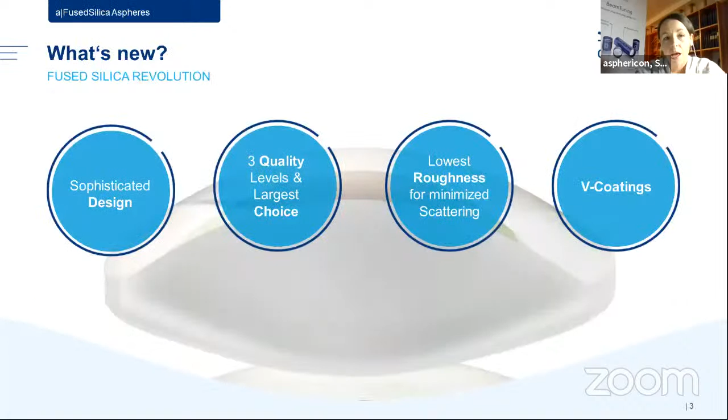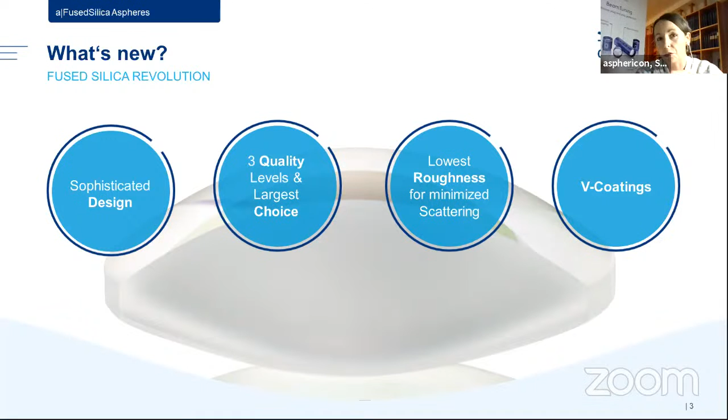What we have done is we have completely enlarged our whole assortment by first adding new designs. Then we have added a lot more quality levels for our customers to choose from, to get really the right quality level for their application needs. We have also implemented new aspheric lenses with a very low roughness. And to round this all up for our customers, we also added new coating lines for them.

So what is that in detail? The optical designs that we have added are all based on 355 nanometers, so totally in the UV range. And this means we have added a lot more diameter to focal length options that our customers can choose from. So everybody will find the perfect fit for its application.

And you should especially look for those UV lenses if you have an application that calls for a low thermal expansion, if you need a low dispersion, or just if you do material processing, or for most ultra-short laser applications, this could be a very good help.

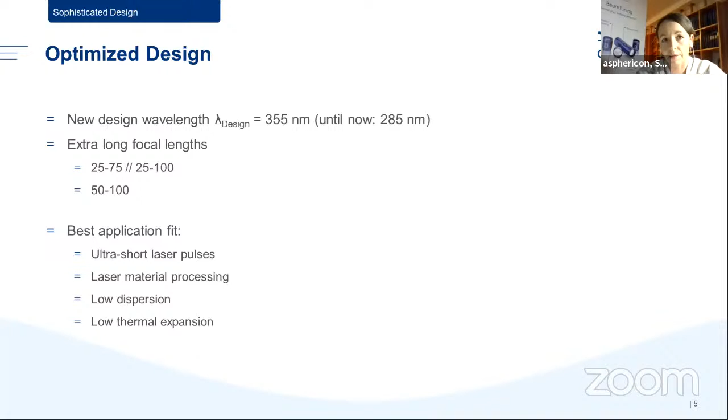The quality levels that we have added.

First is the precision level. This is pretty much a standard level that is very common in the market, and this is what we call our value champion. So it's a very easy to start lens with a surface form deviation of 500 nanometers.

Then we have the ultra quality, which is only 300 nanometers of form deviation. This is about 66% above the industrial average, so it's already a lens with a very high quality performance.

And last but not least, we have implemented our new industrial benchmark that rounds up the beam tuning components. This has a very low surface form deviation, and those are also the lenses that have the very, very low surface roughness.

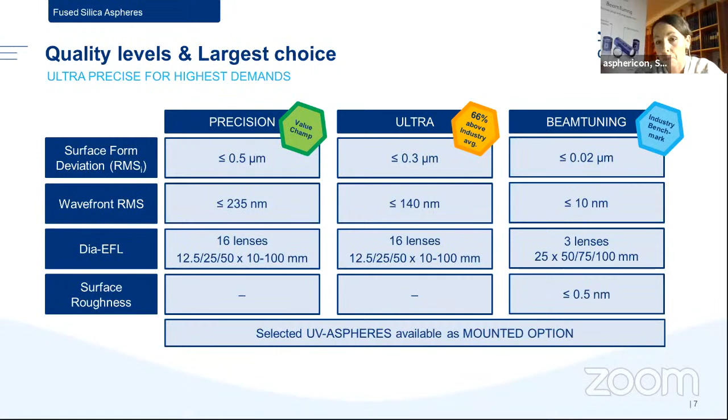The surface roughness is something that we wanted to implement because if it comes to applications that call for low scattering, this is what you should take care of. Low scattering is mainly asked if you have an application with a very high laser power. You don't want to have anything that does backscattering. You really want to avoid this.

And this is very unique in the market, because these are the first off-the-shelf lenses that you can buy with such a low surface roughness for such high power laser applications.

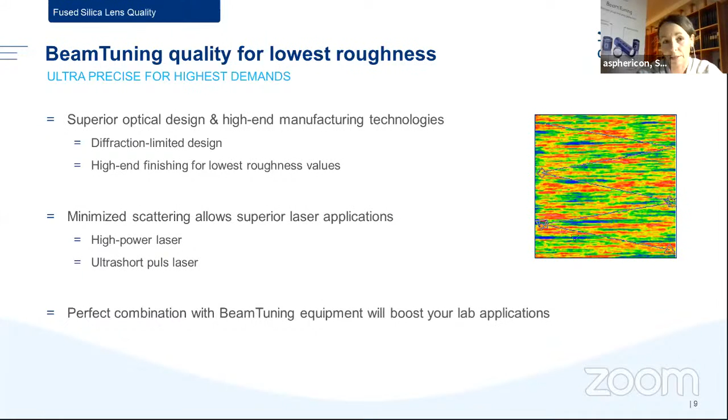You might be aware of our broadband coatings that we offer, but when every photon counts, you want to have a V coating. So we decided to also implement those V coatings, starting with three V coating lines for some very typical laser wavelengths. This helps you find the best solution for your application.

We also offer most of the lenses mounted, which helps you have them perfectly aligned. It makes them very highly modular with all our other beam tuning components or other components from asphericon. It also gives a more easy handling opportunity, and they are compatible with other threads in the market, so you can also use them with cameras you already have in your setup.

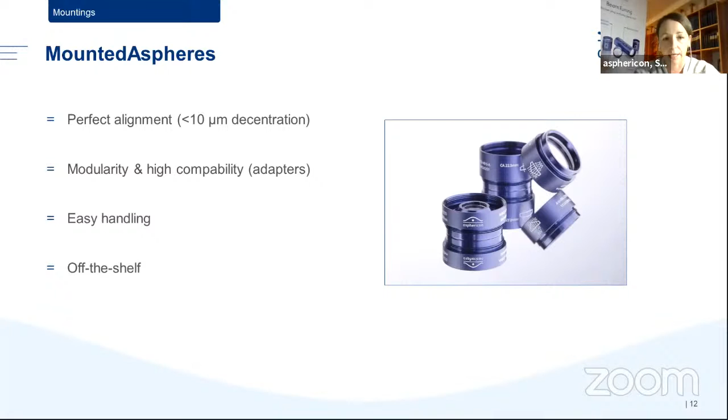What should you take home? With all the new lenses added to our assortment, we can now offer the largest selection of UV aspheres in the whole market that you can buy as off-the-shelf lenses.

You can really start from the value champions up to the new industrial benchmark, where we can offer this very low surface roughness if you want to use such lenses for high power laser applications. And to round it all up, we have those new V coatings available for you. So everybody should find something that fits into their applications where they need aspheric lenses made of fused silica.

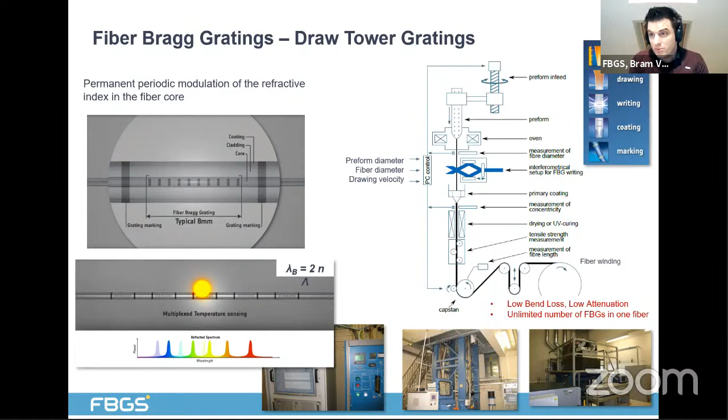And also important, the primary fiber coating is only applied after the grating is inscribed. So when the fiber is coming off the tower, the gratings are inside, the coating is on, and we basically still have the pristine strength of the optical fiber maintained, so that it is not affected by the inscription of the gratings.

Moving then in the direction of shape sensing, a critical aspect are so-called multicore fibers, which are enabling that shape sensing intelligence. A multicore fiber basically consists of several active cores in the same cladding. Typically, there is one center core surrounded by 3 or 6 outer cores. We actually did several iterations of that fiber manufacturing process, standardizing now around a cladding diameter of 125 micrometer with typically 4 overall cores in that multicore fiber.

It's important to mention that the draw tower grating technology is used to, again, combine the grating inscription and the fiber drawing. That means that we then avoid fiber bundling, core-to-core inscriptions, and there is also a very minimal influence of the inscription process on the fiber strength. So the fiber itself is the sensor element, very strong, and is capable of surviving assembly processes, typical sterilization processes coming into play with medical applications.

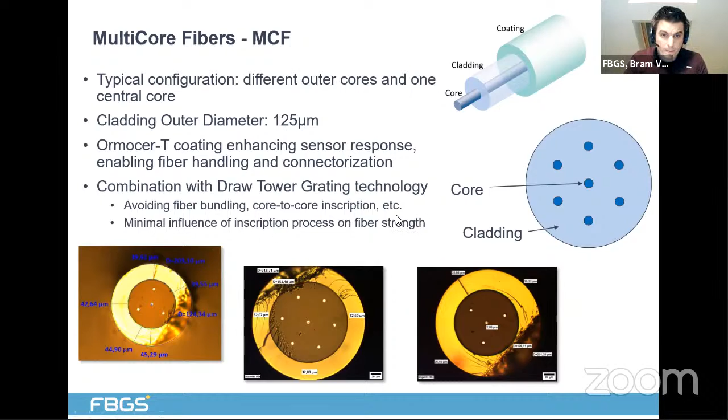If we then take it one step further and we come to the actual product we want to present here and we are actually releasing as we speak, then we of course need to add several other building blocks to come to an overall shape sensing system. We need to connect the fiber, we need to interrogate the fiber.

So we have an interrogation unit, a measurement device capable of reading out multicore fibers and interpreting the Bragg grating responses to translate the sensing information in the fiber into actual shape information capable of visualizing curvatures, position tracking, and so on and so forth.

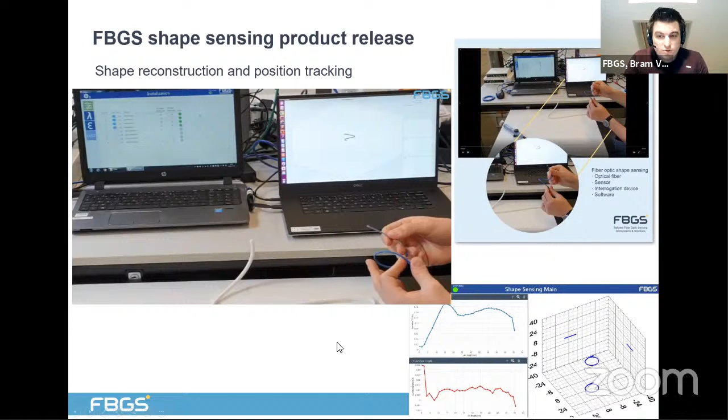This is a very basic visualization. Again, this is a plugin software we developed, can be tailored to the needs of the customer, and is then also typically combined with other feedback mechanisms and other sensing information.

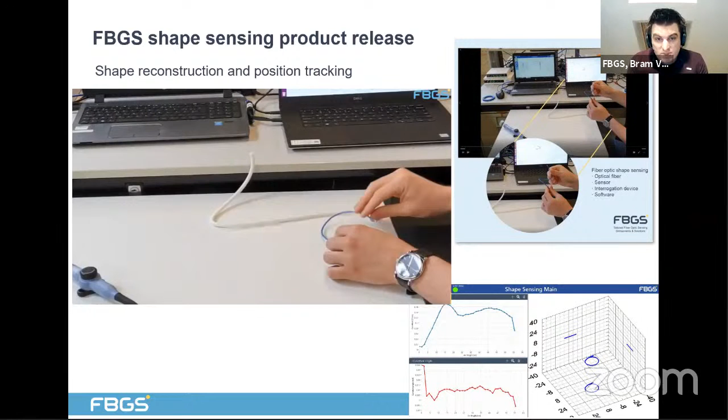I will not go over all this text. I think it's important to mention that we combine the unobtrusive multicore fiber technology and Bragg grating technology in one automated process. One of the key applications we identified is navigating surgical instruments in and on the human body. That's actually a very broad spectrum.

And of course, the reason for that is that the current availability and accuracy of existing tracking tools is very limited. So our customers are reducing health risks and also increasing the efficiency of different surgical procedures and all sorts of medical procedures actually.

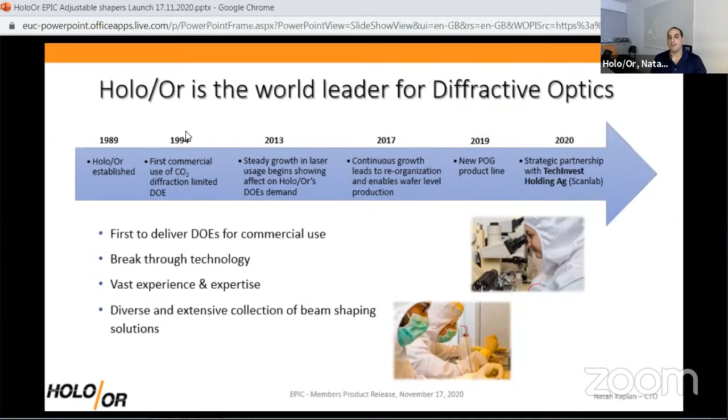For those not familiar with HoloOr, we are one of the world's most veteran producers of diffractive optics for high power. We have more than 31 years of experience in diffractive optics manufacture. We started off with shaping for 10.6 CO2 lasers for Coherent, and went up from there, covering the entire spectrum from the deep UV to the mid IR. HoloOr designs and produces in Israel the diffractive optic components that go into laser systems.

These laser systems can be anything from aesthetic treatment systems such as fractional skin treatment, through industrial systems in the macro like welding or cutting, and in the micro such as micro LED manufacturing, liftoff, scribing for solar panels. It's all done with DOEs. These DOEs, or diffractive optical elements, are basically thin windows with micro and deep patterns on their surface that can shape the phase to any desired profile, and then shape the intensity at the focus of the lens at the far field to whatever you want.

DOEs have a lot of advantages over standard refractive optics. They have high LIDTs because they're flat and don't need high angle coatings. They have absolute angular precision, with no tolerances on that because of lithographic production processes, and they're thin and compact. We can put a lot of shaping on one surface, for example a lens function plus shaping to a circle or a ring, plus other things like splitting.

Today, I want to focus on shaping for welding and cutting with fiber lasers, mostly multimode fiber lasers of 6 kilowatts and above, mostly for automotive, but also aerospace, shipping, etc. DOEs can shape the light of any laser to any desired shape. Many of these shapes, such as this flat top or this racing shape, are often used in welding and cutting.

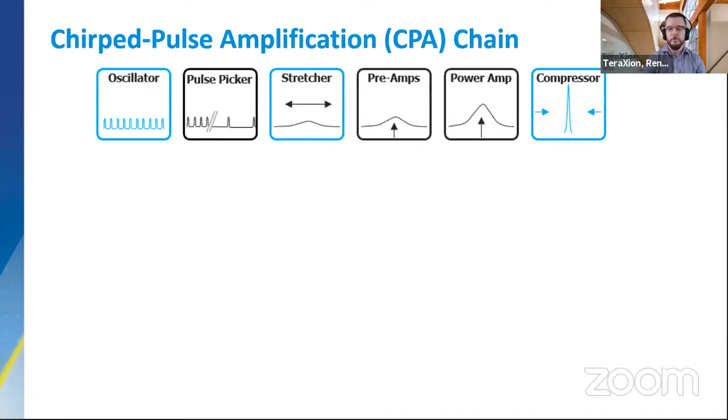You might recognize these building blocks. They represent TeraXion's overview of a chirped pulse amplified ultrafast laser, or CPA architecture laser. Our current offering comprises dispersion compensators for the mode-locked oscillator and a whole family of fixed and tunable pulse stretchers. They stretch the pulse over time before the amplification chain. This is the first function of the CPA technique.

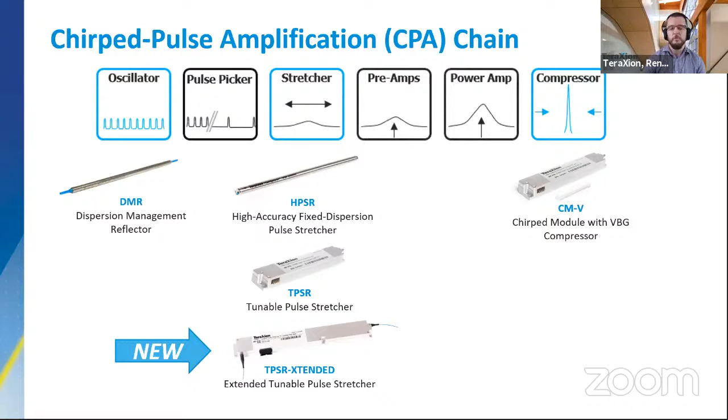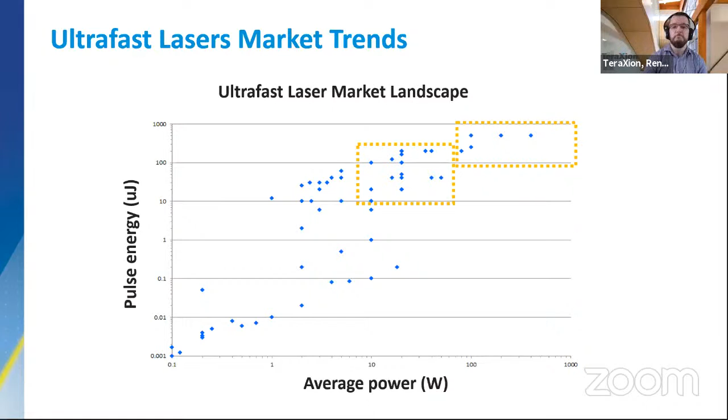This tunable pulse stretcher allows our customers to maximize the amplifier capacity by adding 50% more energy per pulse. It can adjust the high order dispersion up to beta 5. And based on our customer feedback, the tuning feature improves the laser manufacturing yield while maintaining a constant performance for every laser produced. They even improve their laser specification. While it's common to tune the compressor to optimize the pulse quality, it adds some mechanical instabilities and limits the tuning to the second and third order of dispersion. Our customers have reached better results by tuning the stretcher.

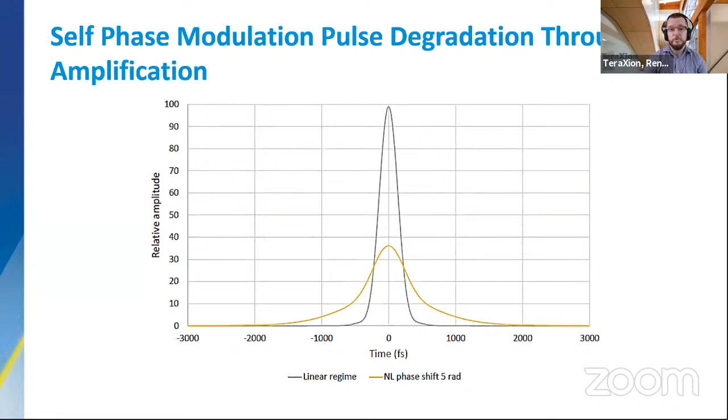Here's an example of an almost perfect pulse coming out of an oscillator. After amplification, some asymmetry or some noisy seed spectrum in combination with self-phase modulation leads to a distorted pulse. By tuning the TPSR-Xtended, it's possible to rebuild an almost perfect pulse without any other adjustment on the laser.

In summary, TeraXion is launching today a brand new tunable pulse stretcher that will enhance ultrafast laser performance, thanks to its increased stretching window and its higher order dispersion tuning. This is the next step in our journey to remain a key component manufacturer for ultrafast laser designers. More than an FBG company, TeraXion will soon increase its presence by bringing new technology to the market. So stay tuned. I invite you to contact me or our sales department to properly select the appropriate component for your specific laser.

Thank you very much, René, for this presentation, and also congratulations on how you are pushing the laser-based manufacturing interaction like crazy in the last months. Very, very impressive. Keep pushing that way. I love success stories. I have 629 success stories in my book. What can they do for you, and what can you do for them? Yeah, the epic question. I was expecting that one.

So, of course, at TeraXion, you can be very strong in one domain, but if you want to have success, you need to partner with several people. So I think if we want to push further the limits of either ultrafast or high-power lasers, you have to collaborate with other companies. And this is really what I'm looking for over the next year. I want to expand the collaboration at TeraXion with other companies doing different technology and push the technology further. At TeraXion, we're experts in filtering, phase control, low noise lasers. So we have many technologies available. And as long as we partner with somebody else, we will bring new technology to the market.

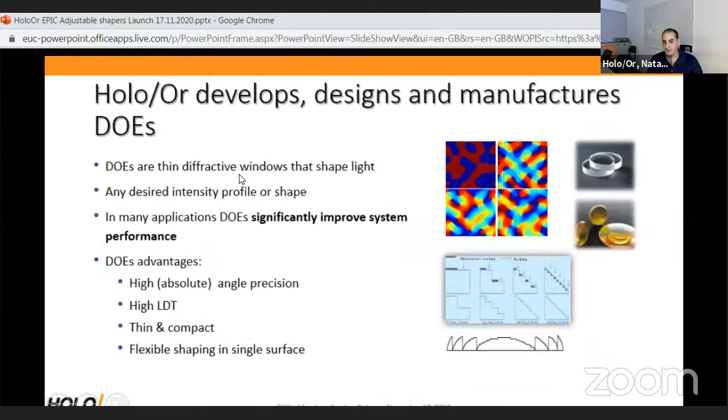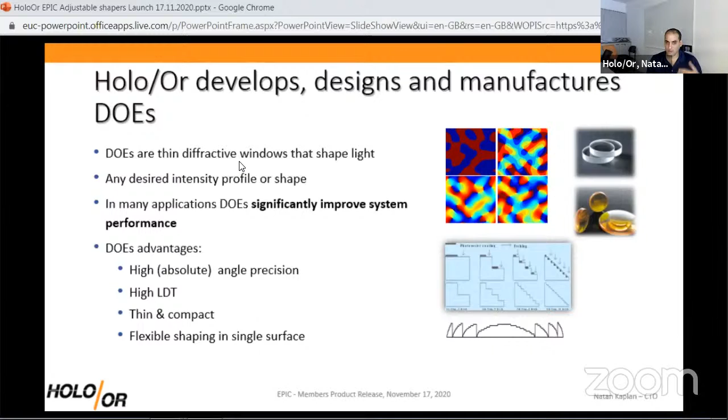Basically, my name is Natan Kaplan from Holo/Or. We are, I think, the world's most veteran company of DOE design and manufacture, especially for high power applications such as shaping of industrial lasers, including for processes such as solar panel processing, laser liftoffs of micro-LEDs, and also macro processes such as cutting and welding, which are going to be my focus today. So we can shape a lot of shapes, and many of these shapes are highly useful for cutting and welding.

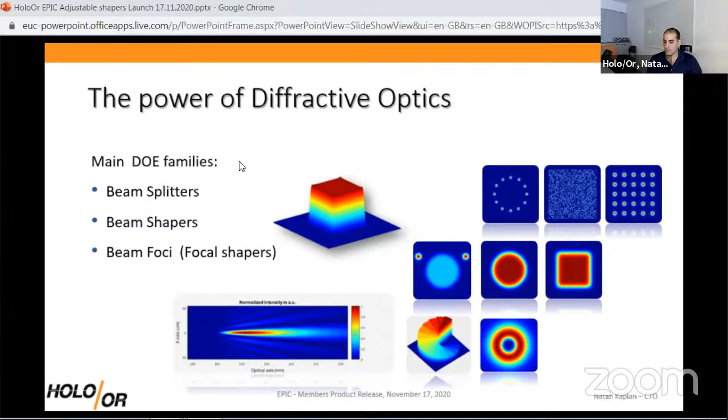So what's new? What am I showing today? Basically, today I want to show that although DOEs are passive components, they give you a certain distribution that does not change. Their quality of shaping is, of course, the best one, much better than most active components such as phase modulators, and you actually can get active or adjustable effects with diffractive optics. So today I'm going to talk about adjustable shaping for cutting and welding with DOEs.

And specifically, I've used this example of the ring mode, which has been shown to be very useful for welding and cutting processes. Now there's a lot of buzz around cutting and welding with ring mode lasers. There are many of these, for example from Trumpf, from nLight, and at least 2 other companies, Coherent, that I know of, that offer fiber lasers for cutting and welding that have both the core mode and an extra higher mode with more power.

And there are quite a lot of publications showing that this gives you better keyhole stability, less spatter, and generally a better weld quality. Now, all these solutions are very fine, but they usually require a specific fiber-coupled laser, which is probably high cost. And also, they all have fast switching, but for many applications in cutting and welding it is not needed. You work on a certain workpiece, and when you go to a different area, you need switching on timescales of hundreds of milliseconds, not much better than that.

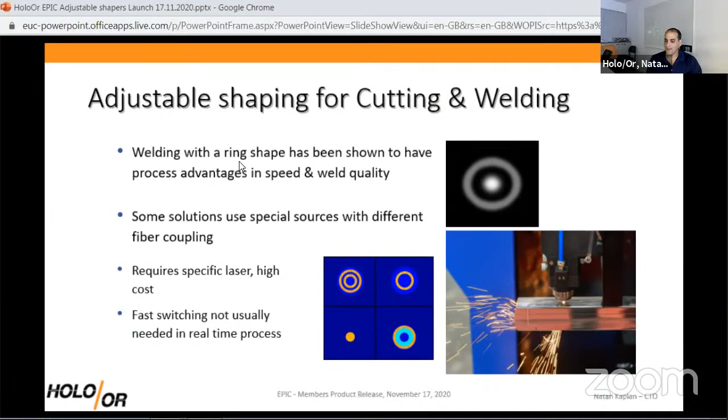So for that, we have a solution based on diffractive optics, which is basically the idea of using a diffractive optics sub-aperture element, which has a part of the aperture having a diffractive pattern that generates, in this case, a ring, while the other part of the aperture generates, in this case, 0 order. It could be a different shape, for example, another ring, or splitting into 2 orders that you play with.

And by moving the laser beam over the apertures, in this case simple mechanical translation would do, you can get different power to the ring or the center. Or for example, if it was double spot welding, you could get more power to the right spot or the left spot. A lot of variability is possible. You can also do this with rotation in a different DOE. I'll just show you a short video of how it works.

One sec, it's very slow, so let's adjust the speed a bit higher. And here it is. This is me moving a DOE. And you can see on the screen in the camera that basically we can move the ring mode versus the central core at any ratio, from 100 in one state to 100 in another.

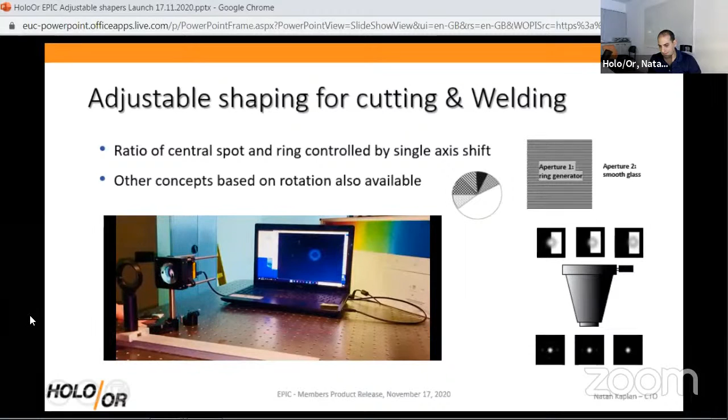This allows one to achieve complete tunability with beam shaping without the need for any specific laser. You can just buy a multi-mode fiber laser, a relatively low-cost investment relative to other types of welding lasers, and by simple integration with such a static component and one computer controlled axis, you can achieve the same functionality of adjustable ring shaping that is highly sought after in the welding and cutting application fields.

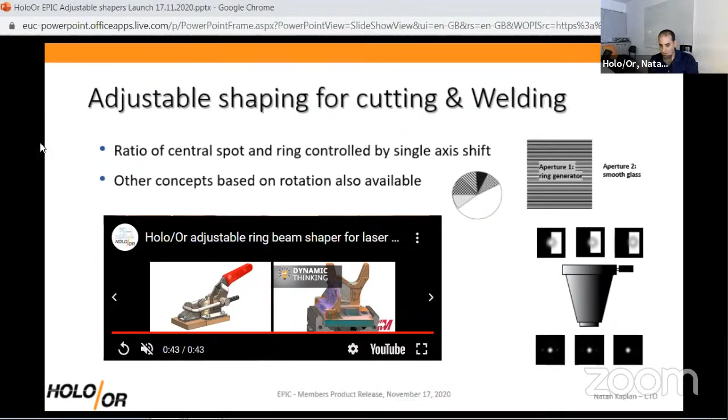We would love to help them with their shaping needs, including help with specific designs for specific distributions for processes as they define, because they know the processes better than me. For us, what they can do is provide the ground for publishable results of this sort of adjustable shaping. We're always looking into cooperation with integrators that are willing to share this data afterwards, whether a European project or directly with them. This way we have proof for our customer that these processes work, and as you know, it's always hard to get this sort of data in this field.

I love the DOE shaping that you have behind you. That's fantastic. What would you tell those companies when they ask you what's new? I think this was quite clear here: the new thing is that you can take a passive component such as a diffractive optic, and by simple adjustment like rotating or shifting or even scanning through it with a galvo, you can get multiple functionality out of the static component.

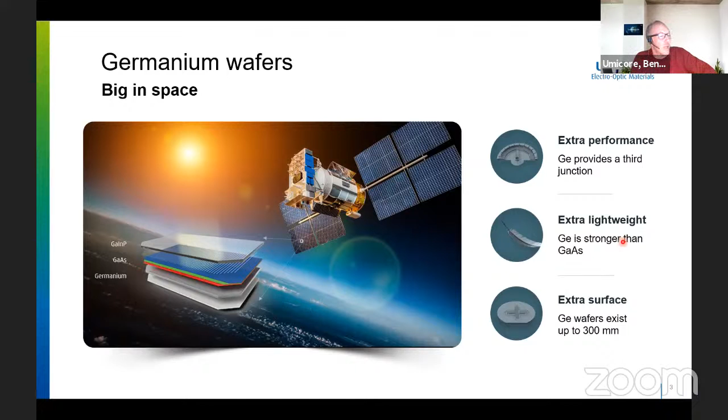Our wafers typically go at 145 microns thickness, and you can have sizes which are much larger than in gallium arsenide. Basically, germanium wafers are defect-free up to 12 inches, very similar to silicon. I think these are a few important elements that are also becoming more and more important for VCSELs. And that's why we believe, as I put here in the middle of the slide, germanium is really going to blow the gallium arsenide out of the water. I understand this is quite a statement, but there are reasons to believe that this is going to be an important evolution. So let me go through why.

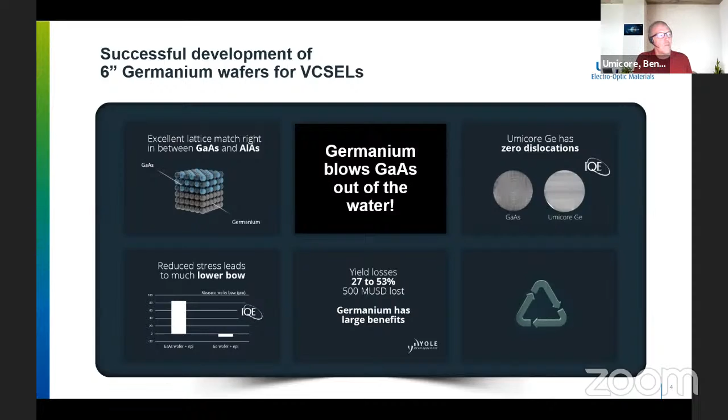If you want samples, if you want to buy those wafers, they are available. If you use your smartphone, you can scan this 2D bar and get in touch with us right away. And just to remind everyone, if you want samples, ask me, because I will pay for the shipping expenses between members. I love when members collaborate and exchange samples.

Bendix, I have people like Lumentum, Finisar, Osram, all of them watching what you can do. What can you do for companies like them, and what do you expect that they can do for you?

Well, what we can do for them, you've seen the yield losses and the cost that they have. I'm sure they're under constant pressure by their customers to bring down the price of the VCSELs. So by using germanium, potentially the cost is going to come down significantly.

What can they do for us? Well, spread the word. Honestly, this is a perception issue. Nobody knows what germanium is. It's completely unknown. The first transistors were made on germanium, everybody knows that, but after that the material disappeared off the face of the earth, so to speak. In space, nobody talks about solar cells for space. So this is really the time for us to go out there and let people know that germanium is really a valuable solution for this.

CMOS foundries love germanium, that's clear. They love it, it's CMOS compatible. Silicon can put thin germanium layers and actually use them as an interface for lattice mismatch materials. When it comes to a company like ST Microelectronics, that is investing in depositing germanium on a CMOS plant,

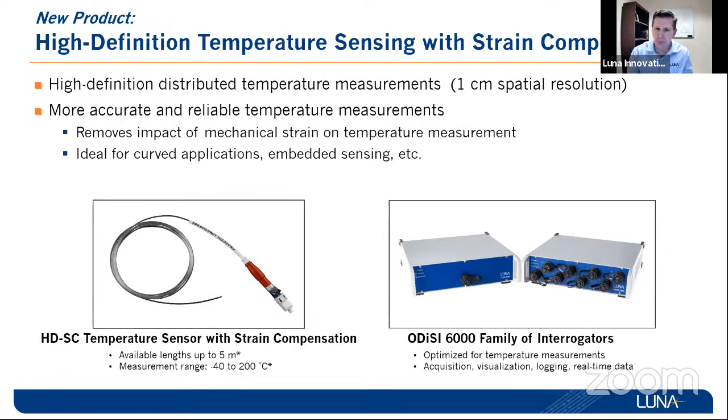So, to summarize the benefits and the applications: again, this high definition distributed measurement capability is very powerful, but you tend to need to work around the fact that it responds to both temperature and strain, resulting in quite a challenge when you're making distributed temperature applications and attaching the fiber to, say, a curved surface, as you see here in the bottom left, or snaking a sensor through a battery pack structure, as you see here.

Those bends and curves tend to cause mechanical strain on the sensor, which in normal sensors would result in large errors. This new strain compensated temperature sensor essentially removes that effect, and you can make those measurements more accurately and without worry. So that's a quick summary of our new temperature measurement capabilities.